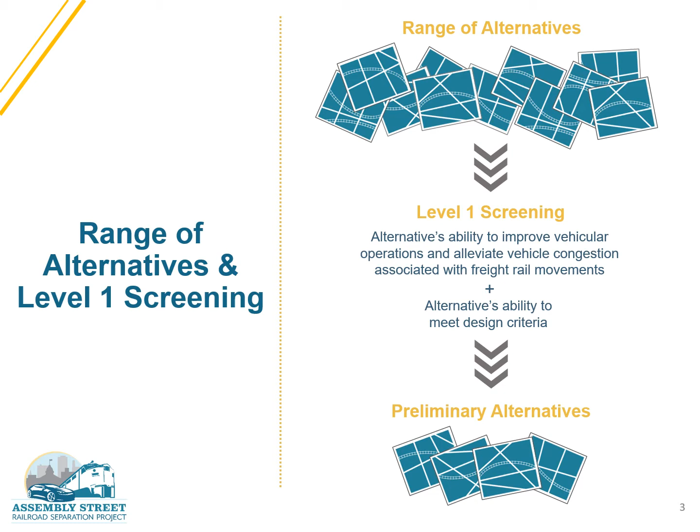Based on the Level 1 screening and discussions with federal and state agencies, city and county representatives, and project stakeholders, preliminary alternatives were identified for further design development and environmental evaluation. The preliminary alternatives include Alternative 1.5, 1.6, 3, 320, 4, 6, and 6.5, as well as two Huger connector alternatives. These preliminary alternatives meet the purpose and need and the design criteria and will be presented individually on the following slides. The NEPA evaluation always considers the no-build or do-nothing alternative, which will also be included in the environmental study.

You can access the preliminary alternatives in an interactive map application at the website shown here. Using the interactive mapper, you can view each alternative in more detail on top of aerials and locate your community or property in relation to the proposed improvements. This mapper is also linked through the project website. The following slides present the details and recommended improvements for the preliminary alternatives.

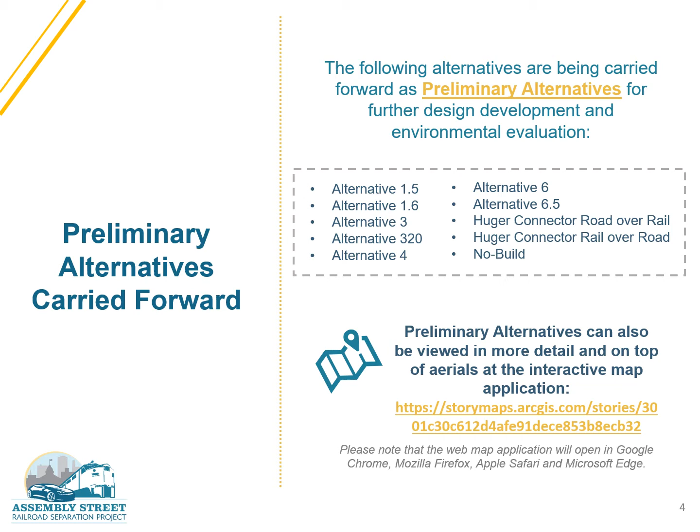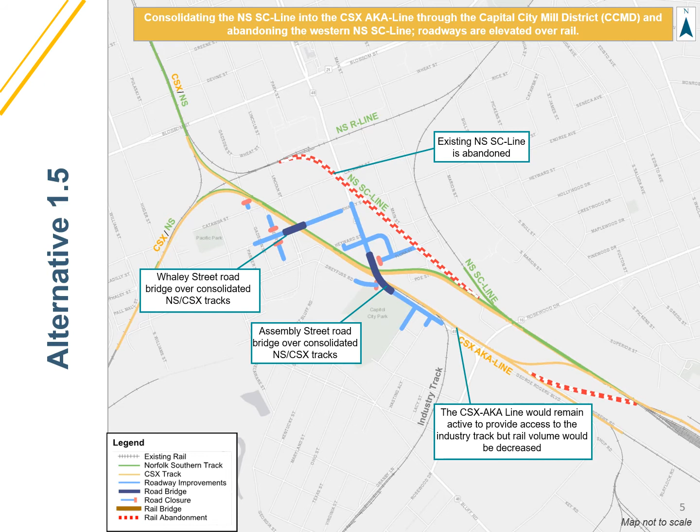Alternative 1.5 involves consolidating the tracks for Norfolk Southern, or NS, which is how it will be referred to going forward, into the CSX corridor through the Capital City Mill District, or CCMD. The Western NS-SC line would be abandoned between Rosewood Drive and the NS-R line. Rail lines remain at grade, but include a Whaley Street road bridge over rail and an Assembly Street road bridge over rail. The CSX AKA line, south of Dreyfuss Road, would remain active to provide access to the industry track. However, rail volume would be decreased.

With the recommended improvements for Alternative 1.5, it is anticipated that the following roadways would need to be permanently closed: Mulberry Street at Whaley Street, Gadsden Street at Catawba Street, Flora Street at Assembly Street, although a new Flora Street connection to Assembly Street via Broadway Street would be provided, and Dreyfuss Street at Assembly Street.

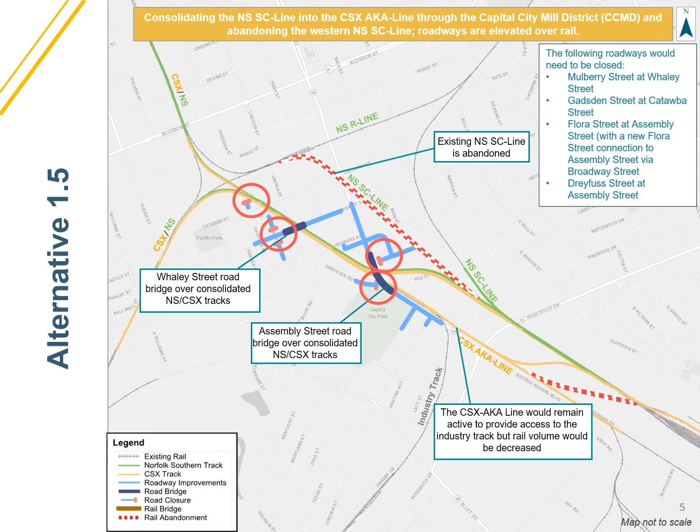Although there would be an increase in rail volume on the consolidated NS-CSX tracks through the CCMD, the proposed grade separations at Whaley Street and Assembly Street would mitigate vehicular congestion within the CCMD and along Assembly Street. The abandonment of the Western NS-SC line would also alleviate vehicle congestion along Assembly Street and within the surrounding university community.

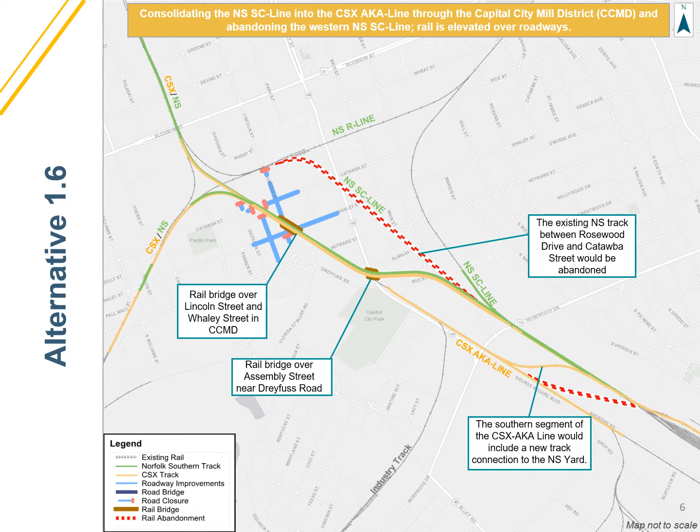Alternative 1.6 involves consolidating NS tracks into the CSX corridor through the CCMD. The Western NS-SC corridor would be abandoned north of Rosewood Drive to the NS-R line. This alternative includes a rail bridge over Lincoln Street and Whaley Street, as well as a rail bridge over Assembly Street near Dreyfuss Road. The southern segment of the CSX AKA line south of Dreyfuss Road would be maintained to provide access to the industry track and would include a new track connection to the NS Yard. The NS-R line and Eastern NS-SC line would remain as is, and there would be no change in volume or routing of existing trains.

With the recommended improvements for Alternative 1.6, it is anticipated that the following roadways would need to be permanently closed: Lincoln Street, south of Whaley Street; Lincoln Street at Greek Village; Gadsden Street, south of the existing CSX crossing; Catawba Street at the existing CSX crossing; and Mulberry Street, south of Catawba Street.

Although there would be an increase in rail volume on the consolidated NS-CSX tracks through the CCMD, the proposed grade separations at Lincoln and Whaley Streets and at Assembly Street would mitigate vehicular congestion within the CCMD and along Assembly Street. The abandonment of the Western NS-SC line would also alleviate vehicle congestion and improve safety along Assembly Street and within the surrounding university community.

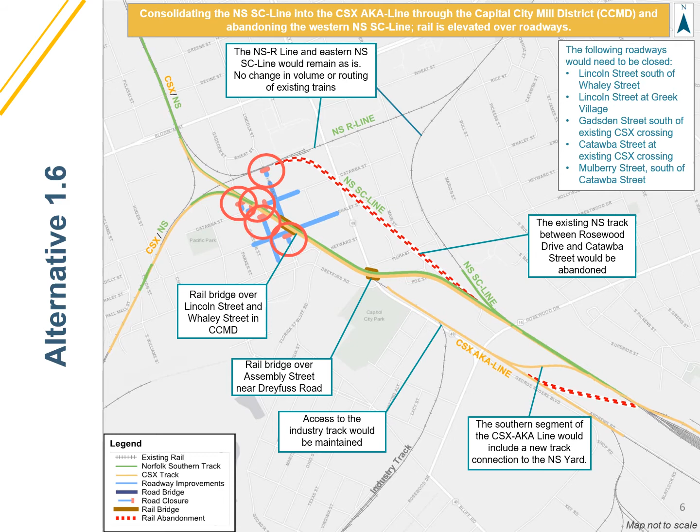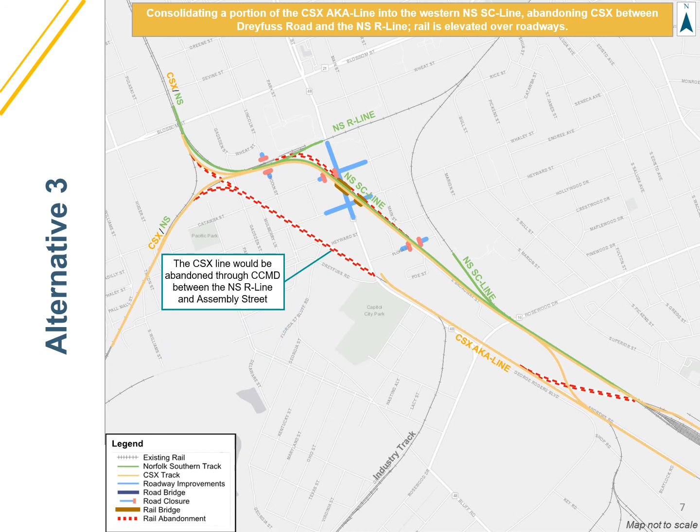Alternative 3 involves consolidating a portion of the CSX AKA line into the Western NSSC line and proposes to abandon the CSX line through the CCMD. This alternative includes a rail bridge over Assembly Street between Catawba and Whaley Streets, and a rail bridge over Whaley Street east of Assembly Street.

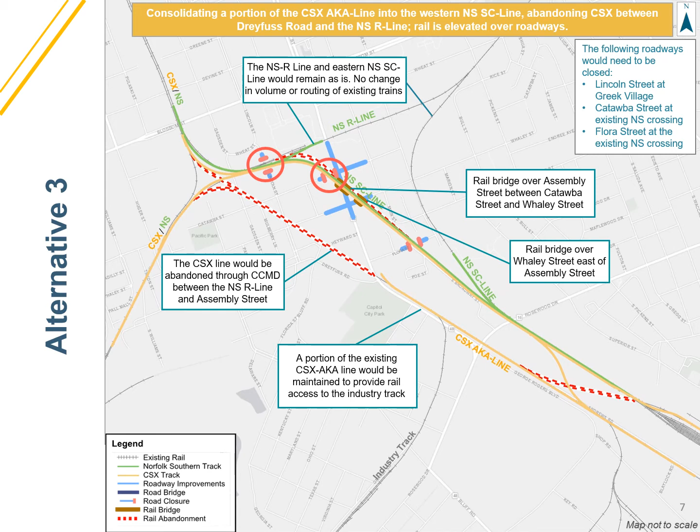A portion of the existing CSX AKA line east of Assembly Street would be maintained to provide access to the industry track. With the recommended improvements for Alternative 3, it is anticipated that the following roadways would need to be closed: Lincoln Street at Greek Village, Catawba Street at the existing NS crossing, and Flora Street at the existing NS crossing. There would be an increase in rail volume on the consolidated NS-CSX tracks near the Assembly Street corridor.

However, the proposed grade separations at Assembly Street and Whaley Street would mitigate vehicular congestion along the Assembly Street corridor. The abandonment of the CSX AKA line through the CCMD would alleviate vehicle congestion and improve safety within the surrounding community.

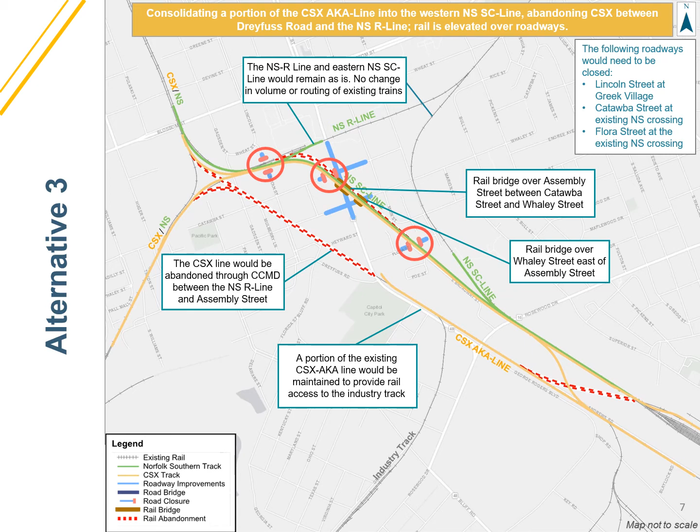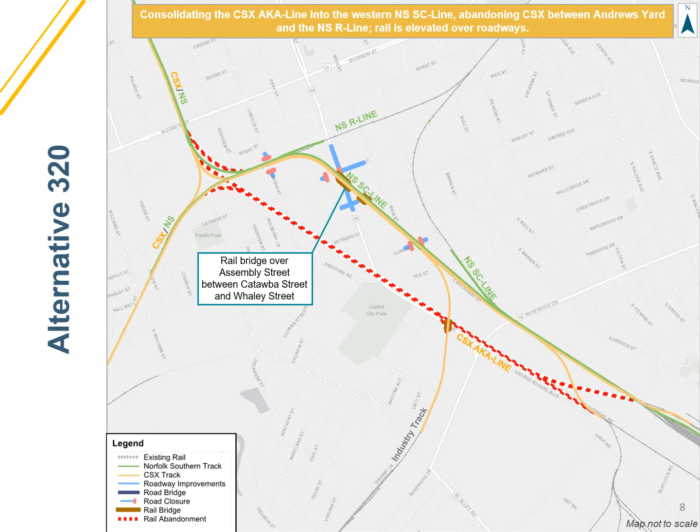Similar to Alternative 3, Alternative 320 involves consolidating the CSX AKA line into the Western NSSC line and proposes abandoning the CSX line through the CCMD. This alternative includes a rail bridge over Assembly Street between Catawba and Whaley Streets, and a rail bridge over Whaley Street east of Assembly Street.

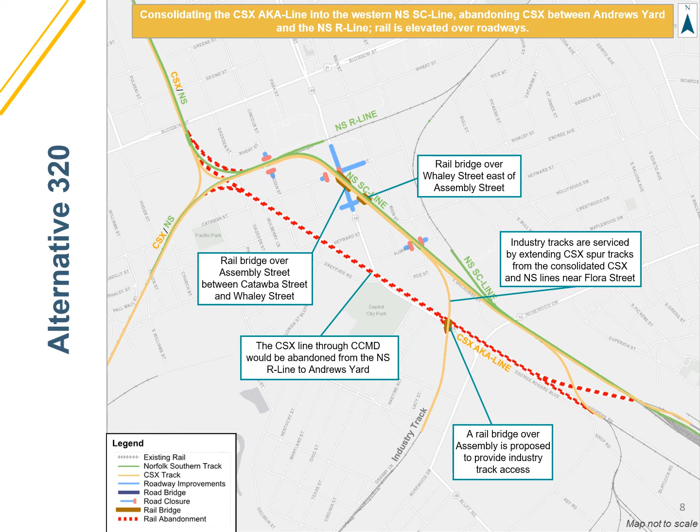The major difference between Alternative 3 and 320 is that 320 proposes that the CSX line through the CCMD be abandoned from the NSR line all the way south to Andrews Yard. To accommodate this, industry tracks are serviced by extending CSX spur tracks from the consolidated CSX and NS lines near Flora Street. This extension of the industry tracks would require a rail bridge over Assembly Street north of Rosewood Drive.

The NSR and NSSC lines would remain as is, and there would be no change in volume or routing of existing trains. With the recommended improvements for Alternative 320, it is anticipated that the following roadways would need to be permanently closed: Lincoln Street at Greek Village, Catawba Street at the existing NS crossing, and Flora Street at the existing NS crossing. The Western NSSC line would experience an increase in rail volume due to the consolidation of the CSX AKA line.

However, the proposed grade separations over Assembly Street between Catawba Street and Whaley Street and grade separation over Whaley Street east of Assembly Street would alleviate vehicular congestion along the Assembly Street corridor. The abandonment of the CSX AKA line through the CCMD would also alleviate congestion and improve safety within the surrounding community.

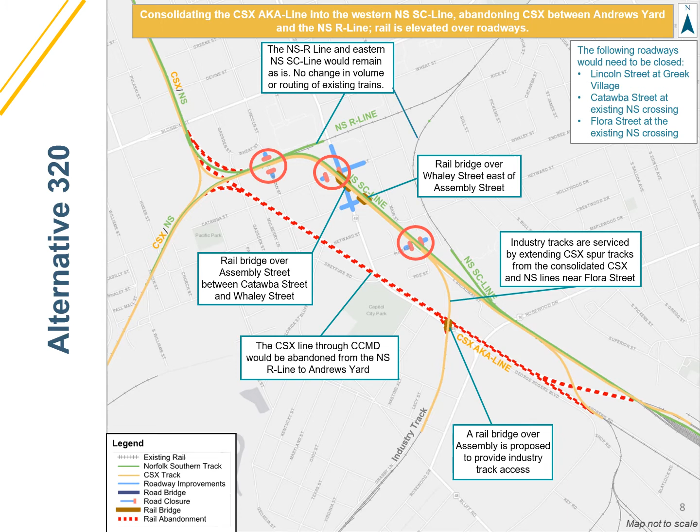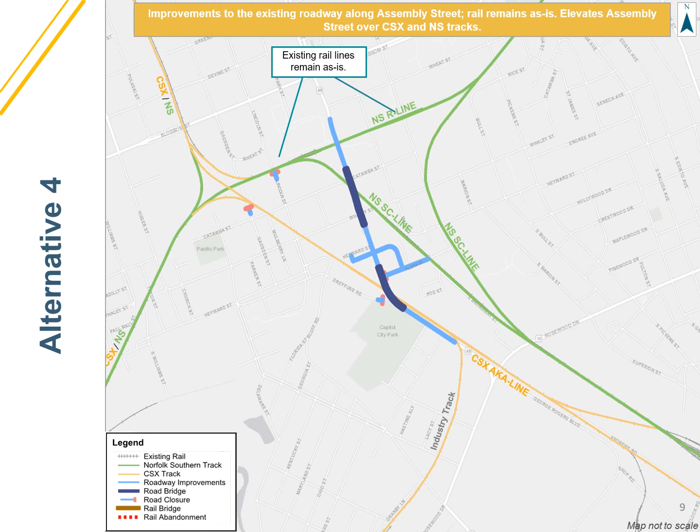Alternative 4 involves changes to the existing roadway along Assembly Street, but not to the existing rail. Existing rail lines remain at grade and as is. An Assembly Street road bridge spanning Catawba and Whaley Streets is proposed over the existing NSSC line. Vehicular traffic on Catawba Street and Whaley Streets would travel under Assembly Street but would not have access to turn onto or off of Assembly Street due to the road bridge. Another Assembly Street road bridge is proposed over existing CSX tracks near Dreyfuss Road.

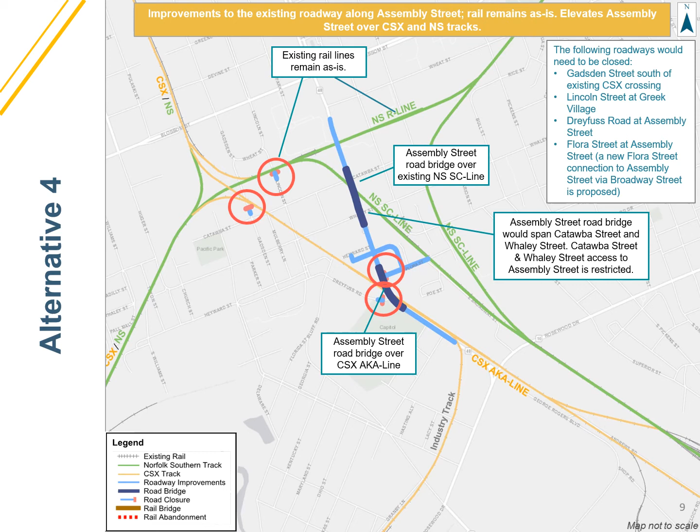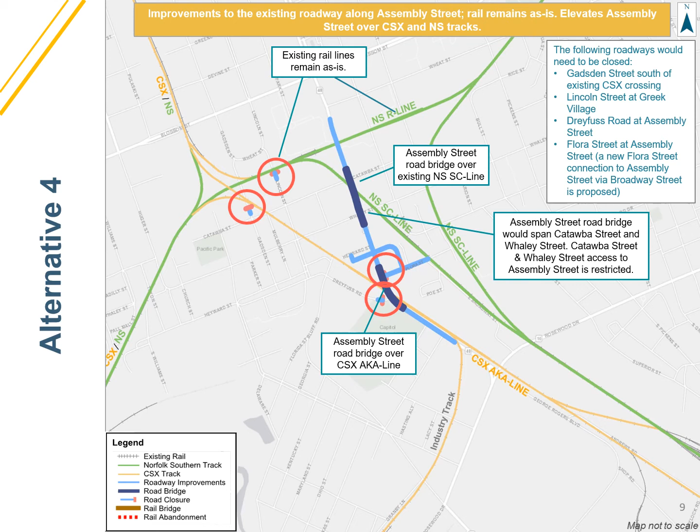With the recommended improvements for Alternative 4, it is anticipated that the following roadways would need to be permanently closed: Gadsden Street, south of the existing CSX crossing; Lincoln Street at Greek Village; Dreyfuss Road at Assembly Street; and Flora Street at Assembly Street, although a new Flora Street connection to Assembly Street via Broadway Street is proposed. The grade separations of Assembly Street over CSX and NS will alleviate vehicular congestion associated with the frequent rail movements through the corridor by removing road and rail conflict points.

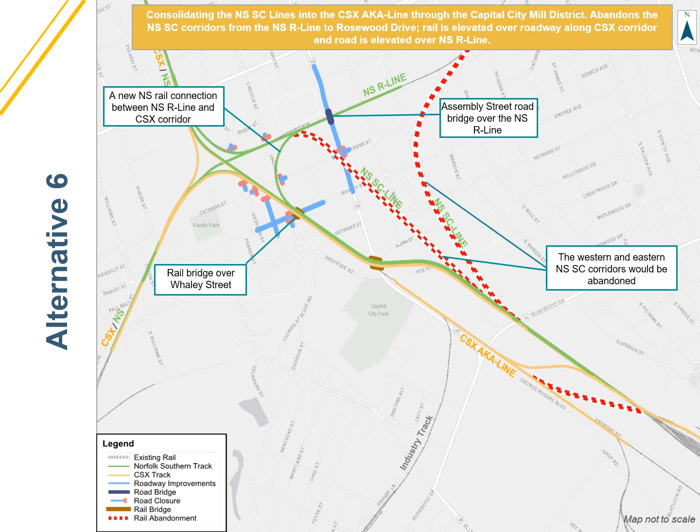An Assembly Street road bridge over the NSR line is proposed with Alternative 6, as well as a rail bridge over Whaley Street. A rail bridge over Assembly Street near Dreyfuss Road is also proposed. A portion of the existing CSX AKA line would be maintained to provide access to the industry track, and the southern segment of the CSX AKA line would include a new track connection to the NS Yard.

With the recommended improvements for Alternative 6, it is anticipated that the following roadways would need to be permanently closed: Gadsden Street, south of the existing CSX crossing; Gadsden Street at Greek Village; Lincoln Street at Greek Village; Catawba Street east of Lincoln Street; Catawba Street at Assembly Street; Catawba Street at the existing CSX crossing; Mulberry Street south of Catawba Street; and Lincoln Street at Whaley Street.

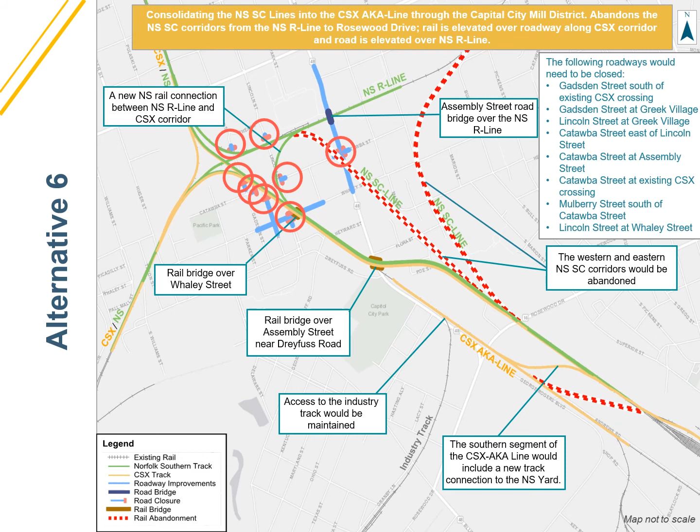Although there would be an increase in rail volume on the consolidated NS-CSX tracks through the CCMD, the proposed grade separations at Assembly Street near Dreyfuss Road and Whaley Street would mitigate vehicular congestion within the study area. The abandonment of the western and eastern NSSC lines would also alleviate vehicle congestion and improve safety along Assembly Street and within the surrounding university community.

Similar to Alternative 6, Alternative 6.5 involves consolidating the western and eastern NSSC lines into the CSX AKA line through the CCMD. This alternative includes a new NS rail connection between the CSX corridor and the NSR line near Lincoln Street, allowing the western and eastern NSSC corridors to be abandoned from Rosewood Drive north toward the NSR line.

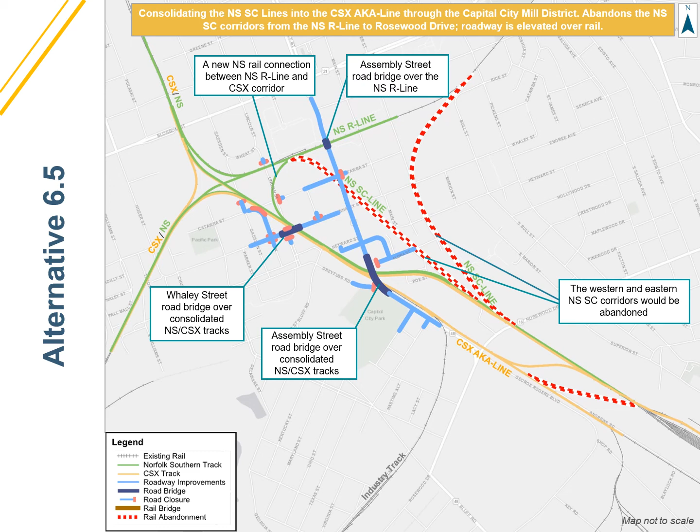The difference between Alternative 6 and 6.5 is that Alternative 6.5 keeps the rail at grade and recommends a Whaley Street road bridge over the NS and CSX tracks, as well as an Assembly Street road bridge over the NS and CSX tracks. Alternative 6.5 also proposes an Assembly Street road bridge over the NSR line. A portion of the existing CSX AKA line would be maintained to provide access to the industry track, and the southern segment of the CSX AKA line would include a new track connection to the NS Yard.

With the recommended improvements for Alternative 6.5, it is anticipated that the following roadways would need to be permanently closed: Lincoln Street from Greek Village to Whaley Street; Mulberry Street at Catawba Street; Catawba Street at Mulberry Street, Lincoln Street, and Assembly Street; Dreyfuss Road at Assembly Street; Park Street at Whaley Street; Flora Street at Assembly Street, although a new Flora Street connection to Assembly Street via Broadway Street would be included; and Catawba Street east of Assembly Street.

There would be an increase in rail volume on the consolidated NS-CSX tracks through the CCMD. However, the proposed grade separations at Whaley Street and Assembly Street would mitigate vehicular congestion within the CCMD and the study area. The abandonment of the western and eastern NS-SC lines would also alleviate vehicle congestion and improve safety along Assembly Street and within the surrounding university community.

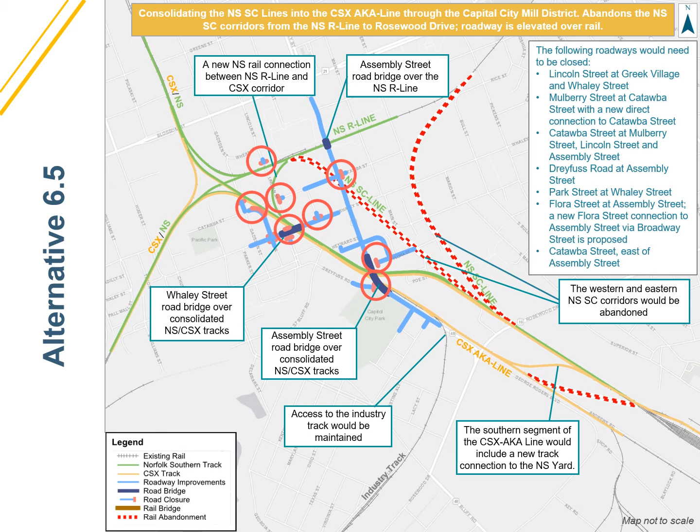The northbound lane on existing Huger Street between Catawba Street and the proposed Huger connector would be removed. Whaley-Huger Street traffic traveling northbound would be required to turn left onto Catawba Street and use Williams Street to get to Blossom Street. A single southbound lane would be maintained south of the connector to allow for southbound traffic to continue from Blossom Street on Huger-Whaley Streets, and the existing Huger Street rail crossing would remain open to allow for local traffic to access residences and businesses in the area.

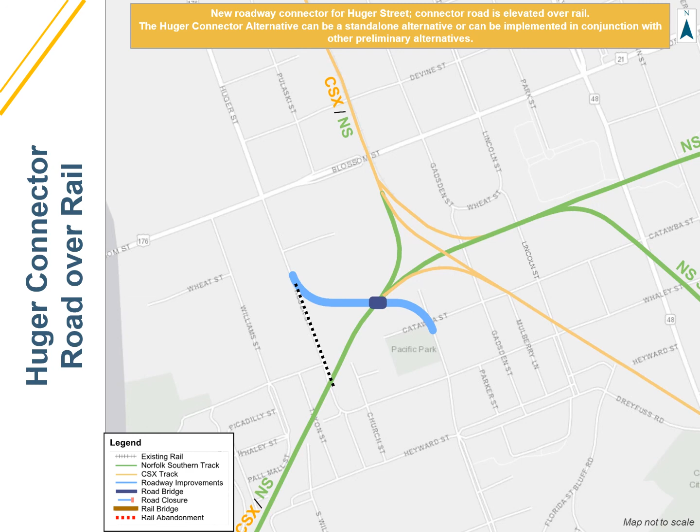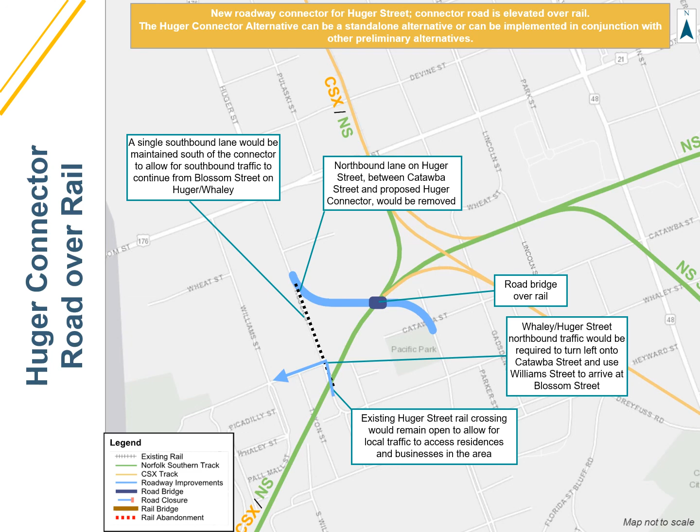Similar to the rail over road Huger connector alternative, this alternative involves the same recommendations for roadway improvements within the surrounding area of the proposed connector, but proposes that the Huger connector roadway be bridged over the existing CSX and NS rail lines. For both Huger connector alternatives, separating the Huger connector roadway from the CSX and NS tracks would alleviate vehicular congestion associated with the frequent rail movements within the CCMD and the study area, and improve overall vehicular mobility. Maintaining the existing at-grade Huger Street crossing allows for local traffic to access residences and businesses within the CCMD.